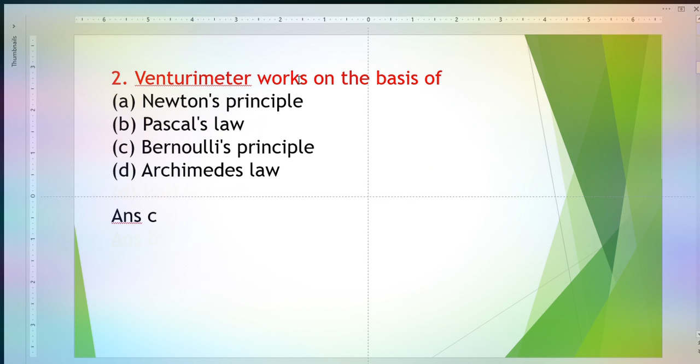Our next question is, Venturi meter works on the basis of Newton's principle, Pascal's law, Bernoulli's principle, Archimedes' law. The answer is Bernoulli's principle. Let us know what is Bernoulli's principle. According to Bernoulli's principle, for ideal fluid, the sum of all energy, that is kinetic energy, potential energy, and internal energy, is always constant.

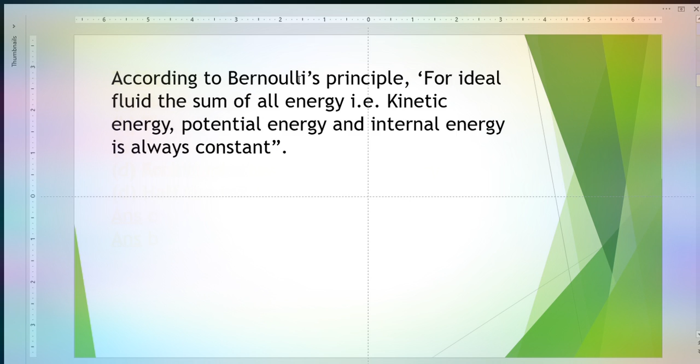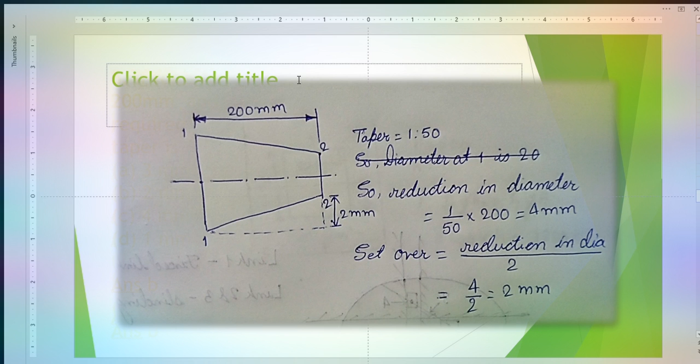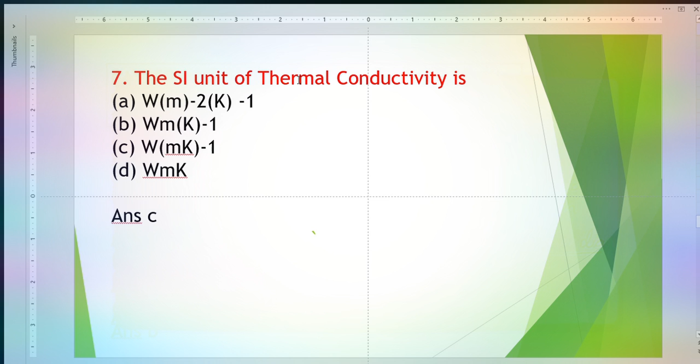Our next question is, the SI unit of thermal conductivity is watt per meter square per Kelvin. Second option is watt meter per Kelvin. Third option is watt meter Kelvin inverse. Fourth, watt meter Kelvin. And the correct option is watt per meter per Kelvin. Let us solve this question.

According to Fourier's law, Q equals negative of K into A into dT by dx, where K equals negative of Q into dx by A into dT, where unit of A is meter square. Unit of dT, the change in temperature between two surfaces, is Kelvin. Unit of heat transferred is watt. Unit of dx, the thickness, is meter. So K equals watt into meter divided by meter square into Kelvin. So unit of K, the thermal conductivity, is watt per meter Kelvin or watt meter inverse Kelvin inverse.

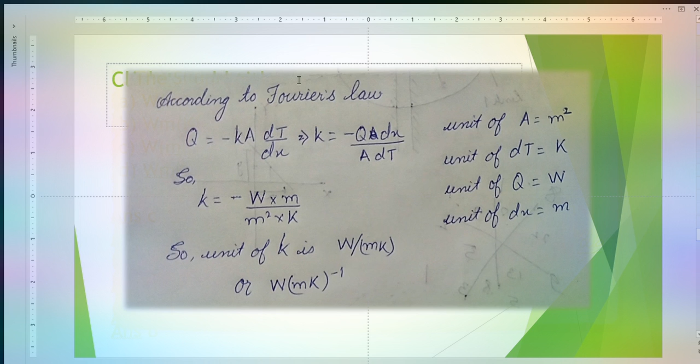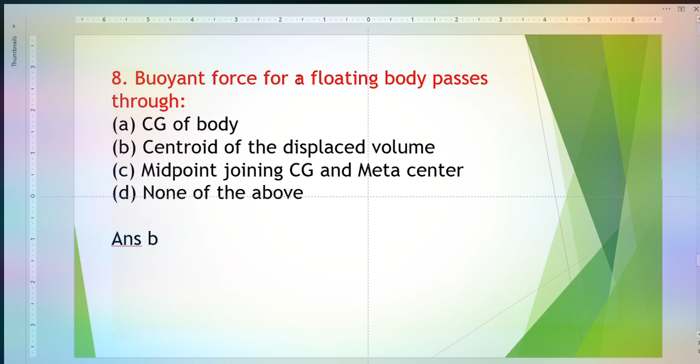Our next question is, buoyant force for a floating body passes through. The options are CG of body, centroid of the displaced volume, midpoint joining CG and metacenter, none of the above. The answer is B, which is centroid of the displaced volume.

Our next question is, the bolts in a rigid flanged coupling connecting two shafts transmitting power are subjected to: shear force and bending moment, pure shear, axial tension only, no load. The correct option is A, shear force and bending moment.

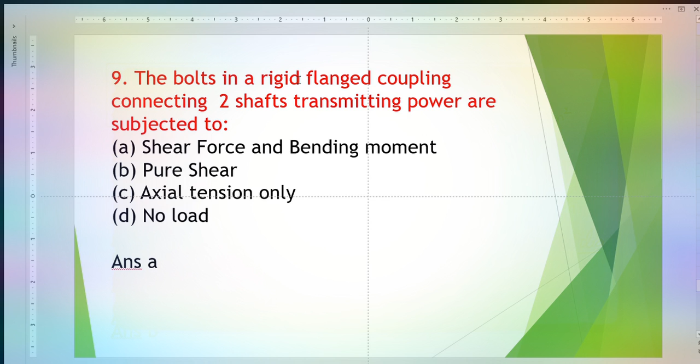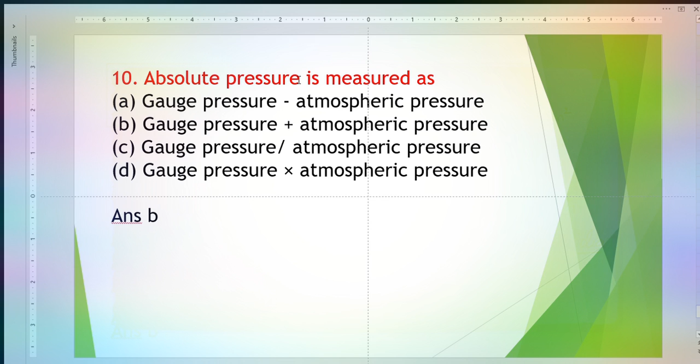Our next question is, absolute pressure is measured as: gauge pressure minus atmospheric pressure, gauge pressure plus atmospheric pressure, gauge pressure divided by atmospheric pressure, gauge pressure multiplied by atmospheric pressure. The correct option is B, that is gauge pressure plus atmospheric pressure.